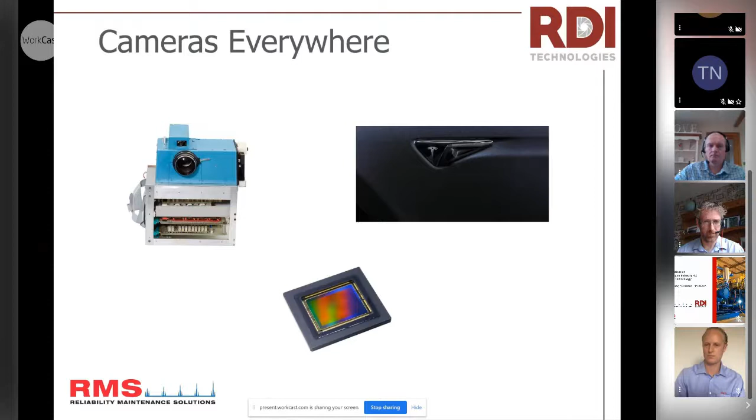Cameras were invented at the turn of the century, but really the digital camera is what has revolutionized the things around us. So here's the first digital camera. You can see it on the screen from Kodak, and then we've also got an image here in the bottom of the CMOS sensor, which really started to change things. That enabled the camera to go into the cell phone, and now we have cameras in cars. So you can see an image of a Tesla there with the camera, and cameras now actually help us drive cars, and that application base is really growing.

We're using them again to drive cars. They're used in AI to distinguish objects, to tell the difference between a human and an animal. They even show me who's at my door. So a Ring doorbell, for example, where my cell phone alerts me to let me know that there's someone at the door. And they control traffic. So they know when you run a red light, and then they send you bills.

Cameras now automate billing processes. Every time I drive across the local bridge, I get a toll in the mail automatically from seeing me drive across the bridge. And so as this application base grows, we want to be able to use that for vibration and machinery monitoring. And that's sort of where motion amplification comes in.

So I'm going to play this video. You'll see a series of videos in this presentation. Just know that the videos should be played back smoothly on your end. Perhaps the internet connection is different for everybody, so there might be a little bit of a jitter, but they should be playing back smoothly for you.

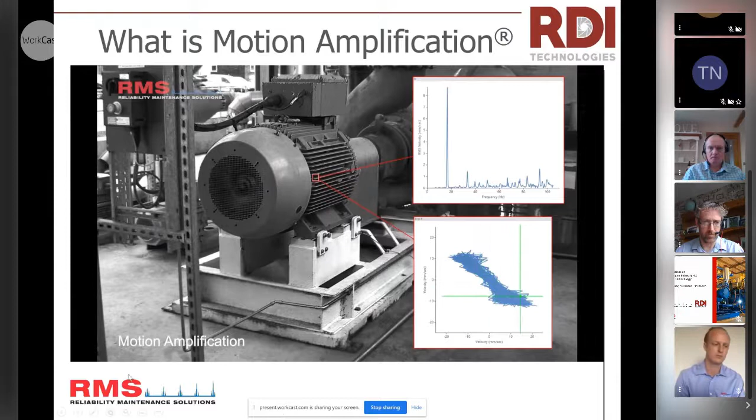But what we're seeing here is motion amplification video, and I'm going to start this over so you can see the beginning here. With your eye, you don't really see any movement, but motion amplification essentially turns every single pixel in the camera into a sensor. And now you've got millions of displacement sensors. Even a modest camera has 1 million pixels in it, and that's even a small resolution camera.

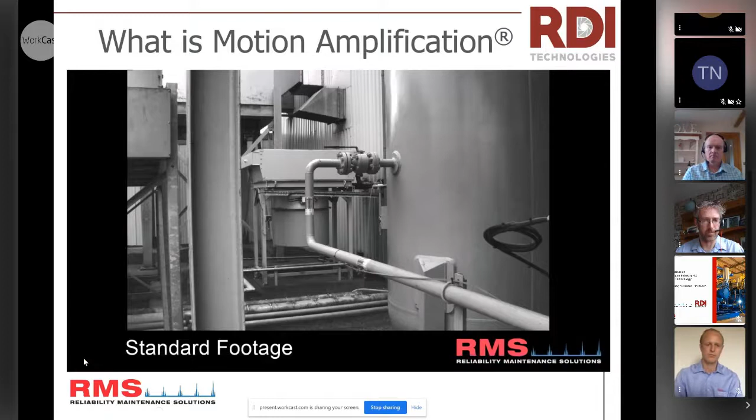And so you can see we can also start to do some interesting things like plot charts and graphs and pull data out. I'll do a short demo showing that. But here you can't see any motion. And now you can turn on the amplification process, and you can actually see the motion. And so this allows the camera to be a machinery monitoring and vibration tool, so that we can visualize motion and also do a lot more: track the motion, measure the orbits, show the plots and paths, measure these things, do spectral analysis, and we'll show some of that in the case studies.

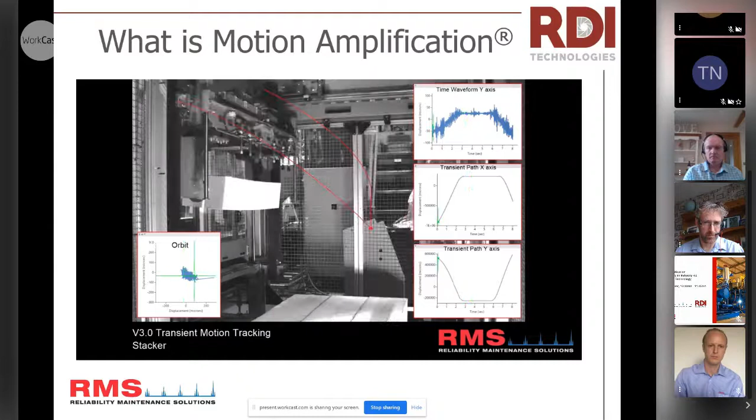And so really what we're trying to do is leverage the fact that we've got millions of pixels, millions of sensors there, that we can use in tandem, and use the human brain to just look at it and quickly make an assessment right there on the spot. And then also communicate that issue to other people, even if they're a non-technical person.

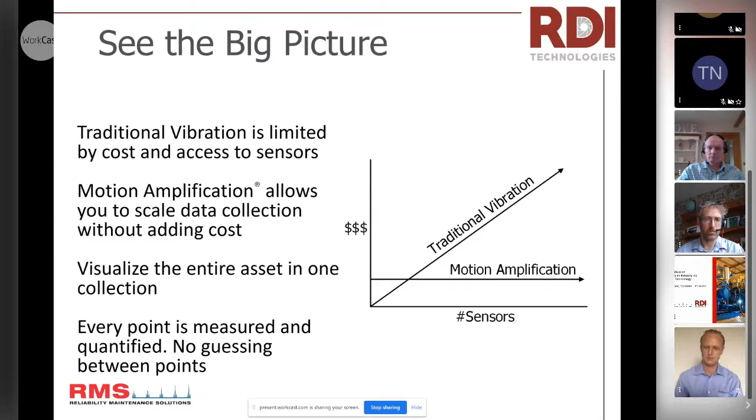So here we can see that as you scale up your data collection process, it gets pretty cumbersome and pretty expensive. But with motion amplification, you can think about adding 1 pixel or 2 pixels or a million pixels. It really makes no difference because it's all nicely packaged in a camera. And you can use that as your sensor and your data collection. You can do full field vibration.

So a little bit about the technical details. It's really measuring displacement. That's fundamentally what we're measuring here, and that makes it a really nice tool because there aren't a lot of displacement tools that are common in data collection with machinery and vibration. You can do it live. I'll do a demonstration here. You can amplify it up to hundreds of times. And you can show individual or overall motions, both. And that's really key because some faults manifest at individual frequencies.

0.01 mils, you can essentially see anything that is of interest to you. So let me go into a demo here, and I'll show you some of these benefits. We'll talk about why it's a complementary tool and how it's improved safety. And then also it measures this large field of view.

That's this full field vibration technique; being able to see the entire field of view and pick out different parts is really important. But I want to also really emphasize this communication piece. I mentioned it before, but I like to usually think of it as one part analysis and equal part communication, because if you collect data and you have the best data in the world, this spectrum tells the story of what's wrong with the machine.

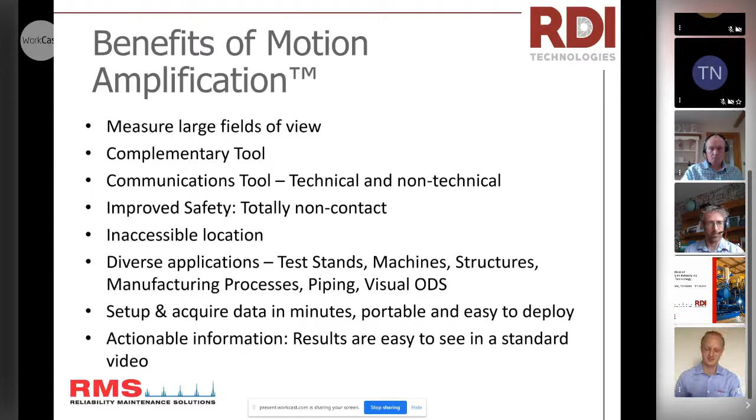If you can't get buy-in from that piece of data to get movement on repairing machinery, it's really as if that data didn't exist at all, because you've not been able to take action. And so that's a really important piece, that last bullet there, the actionable information, because you can actually do something with it. So you've got a couple ways to deliver it.

You can put these systems together, connect them over a network. They all talk to each other. And you can do online continuous monitoring, send videos to the cloud and get them on your phone, and essentially deploy as many cameras as you want through a facility, and they're all interacting with each other.

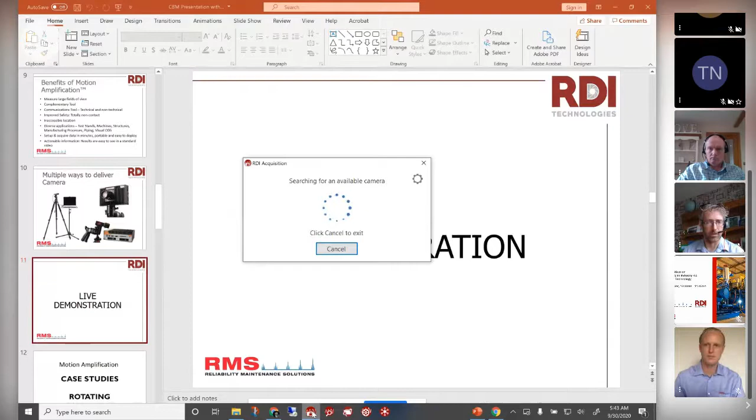Okay, so let me get straight to the demonstration here. I'm going to turn on a camera. I've got a rotor kit, a little machine vibration trainer that I've got set up. I want to turn it on. So, I've already focused this. You would normally focus this, set your exposure, the brightness, that sort of thing. We've already done that for the sake of time, but it takes 5-10 minutes to set up.

One of the things I want to show you is this live amplification. If I just hit this button, I can immediately show live amplification. All the videos that you see here, this is the process it takes to get them. There's no magic going on behind the scenes. It really is this quick. So you can actually do scanning right there in the field with this live amplification.

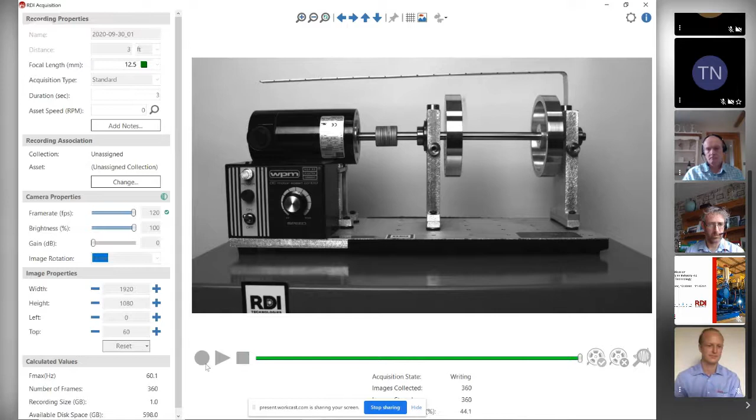If I wanted to know how much that's moving, live on the spot, I can draw a measurement here and actually get a time waveform and a frequency spectrum right there. That tells me that's moving 1 mil in one direction and 5 mils, or 10 mils peak to peak, in another direction. Let me take a data collection here, just for about 3 seconds. And then I'm going to go into the amplification process.

I'll turn that rotor kit off so it's not so loud. And then here we've got the amplification software. You can see I can play it back and it's instant. There's no processing time for this. And again, if I wanted to make a measurement, you just draw a box here. You can make as many of those as you want. Pretty easy. I'm going to move that box up here to the tip of that cantilever beam and make a measurement there.

So if I were to isolate that one, green means it's going to stay, and I hit apply, it's going to go through the process of filtering the data here to only show that one frequency. And that's really important because, again, certain faults manifest at one frequency.

Another thing I wanted to demonstrate is the speed at which you can do this. The key part here is that this is field usable. All this can be done in the field - you make an analysis and look at it right there on the spot.

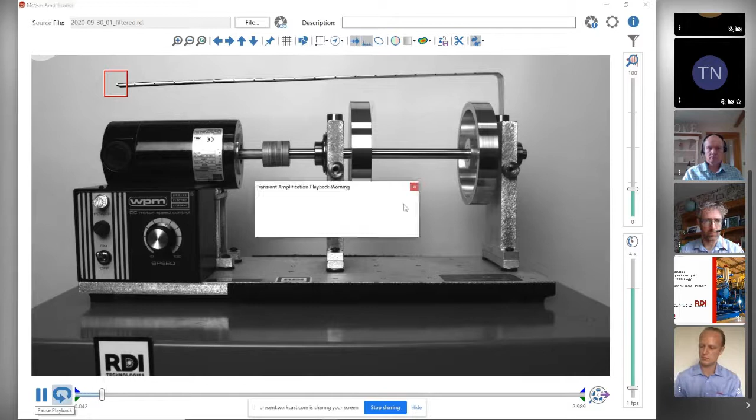Remember that motor was moving quite a bit, but if I play this back, you can see that the only thing moving is the beam. You can see that beam moving up and down, and the motor's totally frozen. Again, we filtered for the beam frequency.

If this was a fault, it would manifest and show you exactly what the fault is. Let me go back and show the original, where everything was moving. You can see now we've isolated that beam frequency. I just wanted to show a short demo to set Stuart up here.

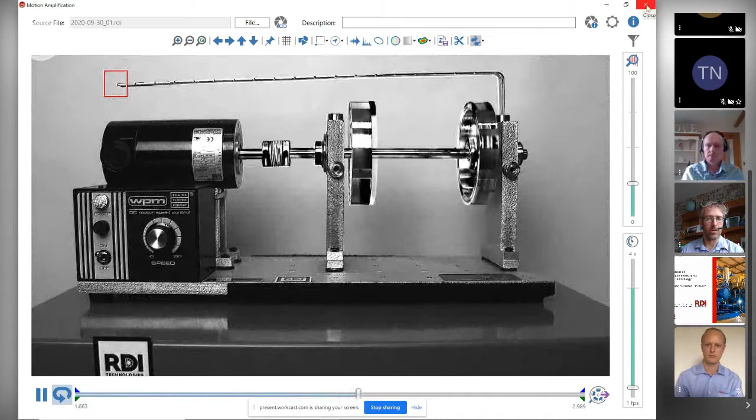I'm going to hand it over to Stuart. I just wanted to show, in preparation for the case studies he's going to show, exactly how easy and quick it is to collect these videos.

Thanks for that, Jeff, great presentation. It's Stuart Walker from RMS, and I want to go through a few case studies and examples of the technology. As Jeff mentioned, for me one of the most powerful things with this technology is its visual aspect. I've been to a lot of sites, and quite quickly we learned that the visual side was key, because people could understand the faults you're seeing.

So Jeff, if you want to play the first slide please. We've got a pump here, and as you can see, there's the standard footage. Then as it moves, you can see the concrete base has failed. This becomes really clear with the camera - there's your standard footage, and you can see there are cracks there. So very easily you can see this whole base needs repairing. It's not just a fault on the motor or pump.

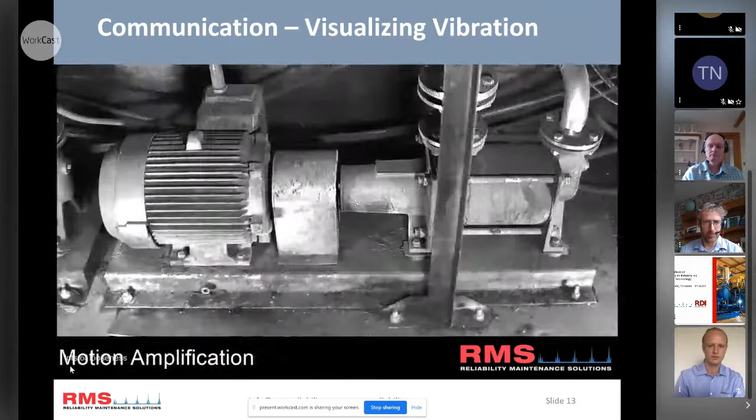This next set, they had lots of reliability problems with these pumps, and we can see the motion there really bad - again, base problems. I think you can also see some misalignment; the pump and motor are moving out of phase. This needs a total overhaul. Again, the beauty of the camera is you can look at the whole system - we can see the pipe trying to rip the pump off the bed, and we can do a measurement there as well. So from a communication tool, unbelievable.

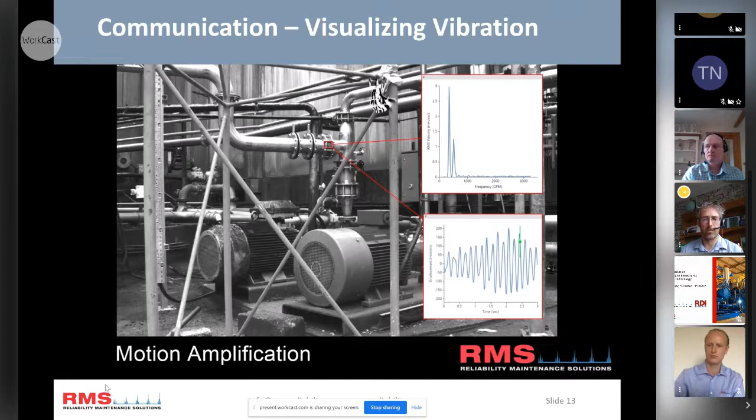I've been to sites where faults that weren't repaired before are suddenly being repaired because people understand the problem. Next slide please, Jeff. Sorry Jeff, next slide.

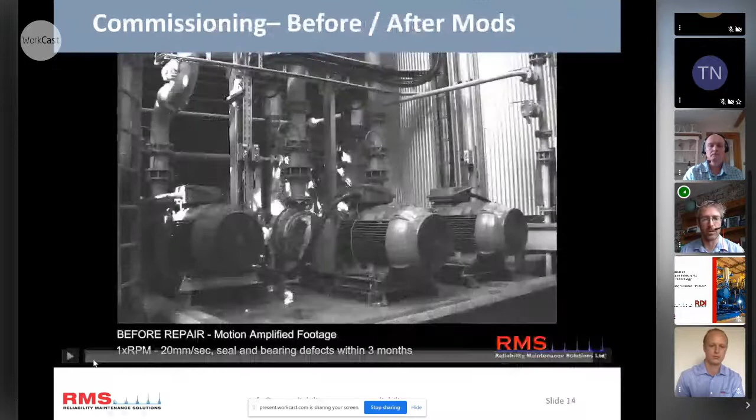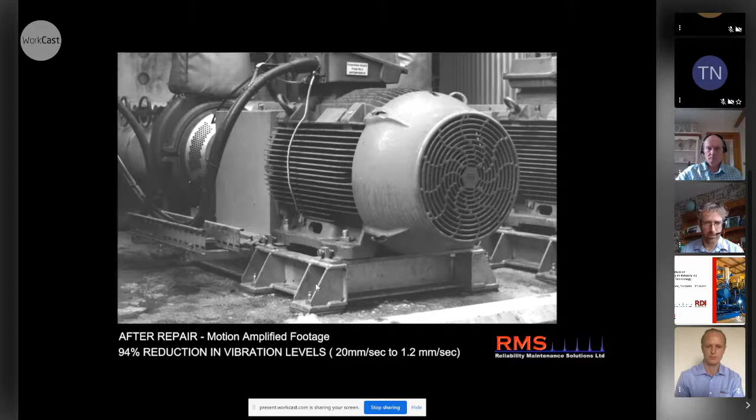Here we've got, again, a base problem. These were newly installed pumps with a lot of vibration on them - 20 millimeters per second, bearing faults, seal failures. The CBM team wanted us to have a look with the camera, and the camera just exposes all the weakness with the base, every little looseness. Eventually these bases got replaced, and now you can see we've gone from 20 millimeters per second to 1.2 - a 94% reduction.

What's key in these videos, you'll notice when the vibration levels are low, when we amplify the video you don't actually see any motion. In other words, you can't make a good machine look bad. Next slide please, Jeff.

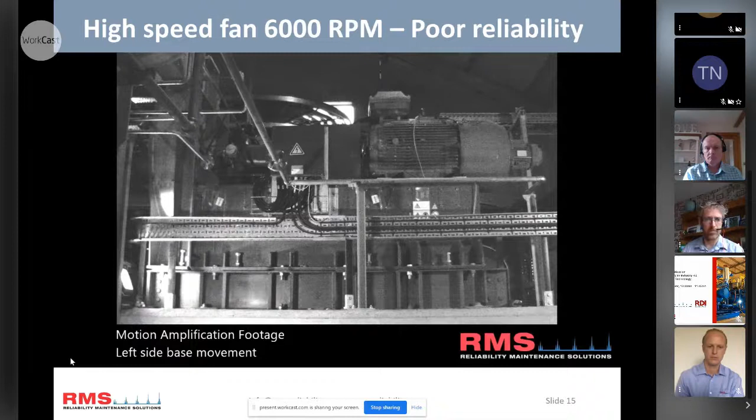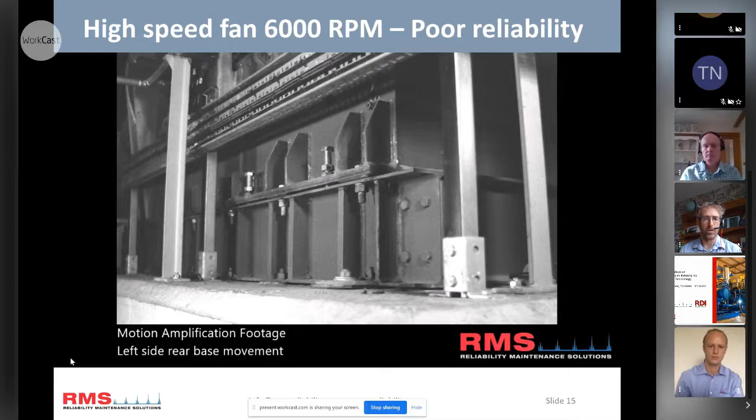This machine is a higher frequency machine - a fan doing 6,000 RPM, and they were getting raised vibration levels on the motor at the rear. When we looked with the camera, we could visualize the whole asset, and we could see vertically the motor had motion. Looking closer, we found it was the way the base had been mounted to the concrete plinth - there were packings used, which wasn't good. You can actually see the motion there. It's not excessive, but it's enough - it's doing about 10 millimeters per second, this one.

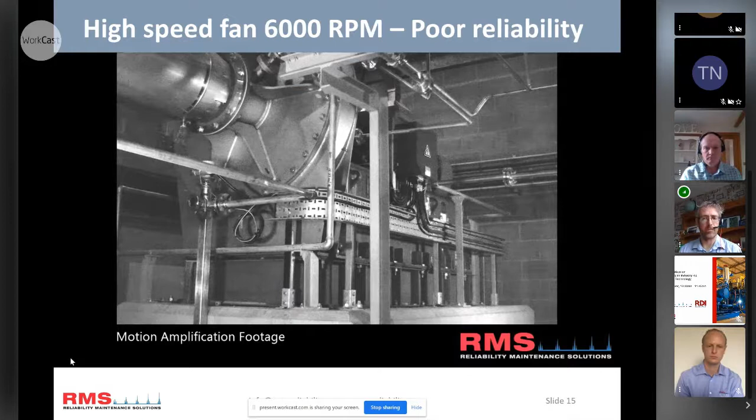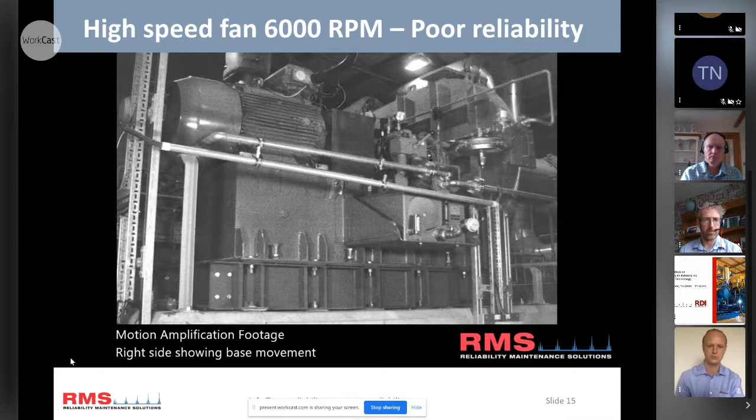We could even see a loose bolt there, and you can see the flexing of this structure. You've got to imagine this thing is doing 6,000 RPM, so this is occurring really often when we're looking at the data. We do lots of different angles when we get on site to document the machine - we don't just take one shot, we'll look at different angles to see where we see the motion. You can see on this right-hand side, this next shot really shows the problem with the packings - the motion there, it's resting, it's flexing, and this is the problem of this machine. They're currently on with repairing this, and I'll get some aftershots.

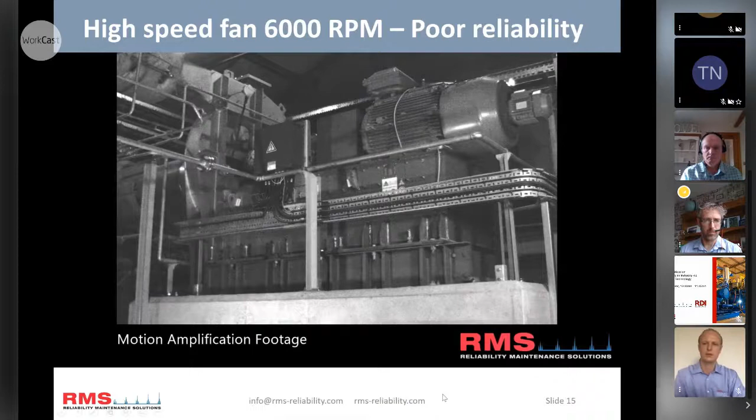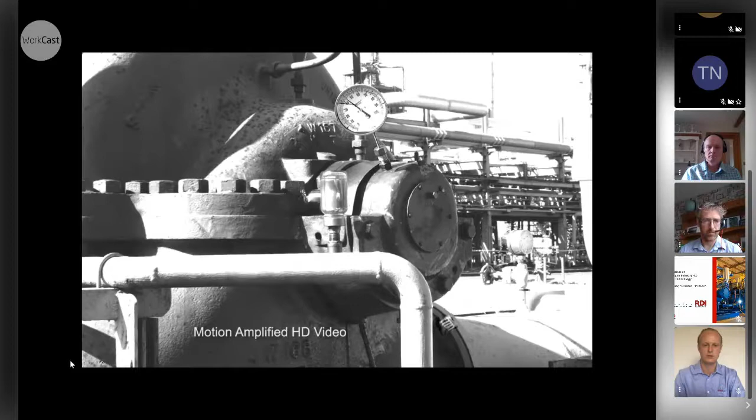So this was an interesting pump problem we had. It had repeat failures, seal and bearing failures. It turned out the problem - if we watch the video here, this is standard footage, and then we see the motion amplified. Can you see it's sort of flexing the bearing? Initially we thought it was loose, but when you look, everything's tight. So these are actual forces inside.

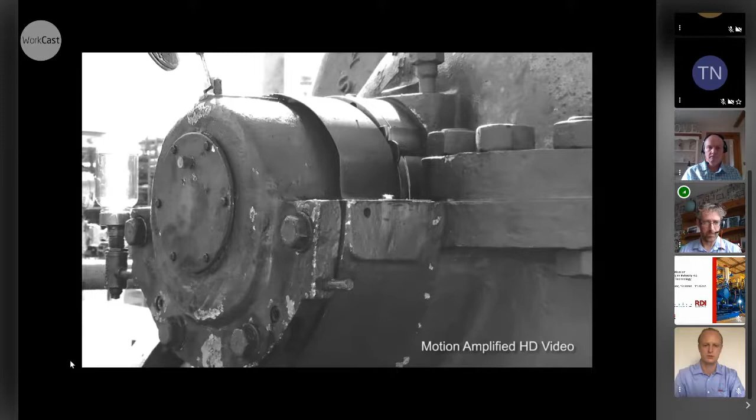After we saw that, we said, what's the history of this machine? And it turned out the housing had been machined incorrectly two years previous, and that was causing the problem. Next slide, please.

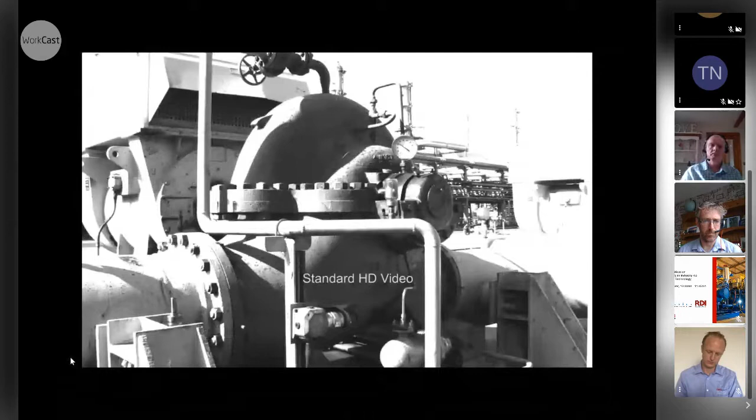So this is one I actually got last week, the follow-up. Very often pumps are put on VSD drives, variable speed, in the modern way of doing it. But unfortunately, if you hit a resonance, you're going to have problems.

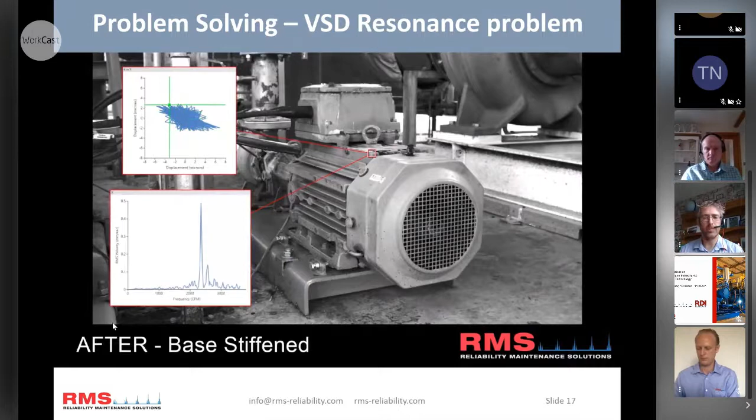So if we play this video, I'll show you the before and after. So this is the before - it's a resonant condition, the base is flexing, lots of vibration up to nearly 20 millimeters per second. Stiffen the base, and you can see there's a massive reduction, I think it was 18 down to 0.5. Big difference before and after, and it's so visual with the technology. Next slide, please.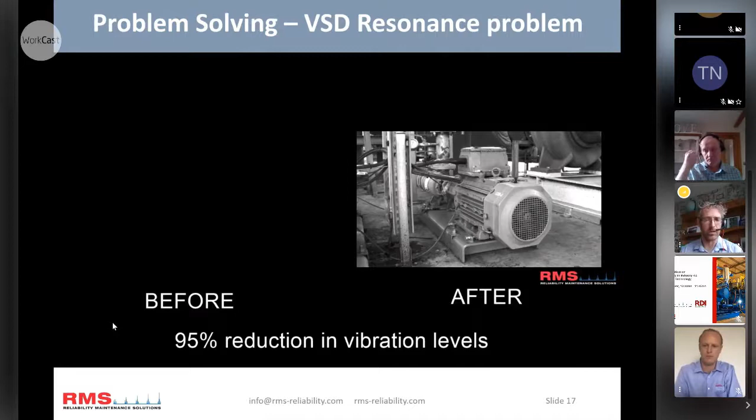So we're going to look at some piping examples now. The camera really excels at this because we can do non-contact, and a lot of piping, especially in the oil and gas industry, is quite remote. You can't put accelerometers on there easily. We found the motion amplification is a great tool for scanning. So if we play the first video...

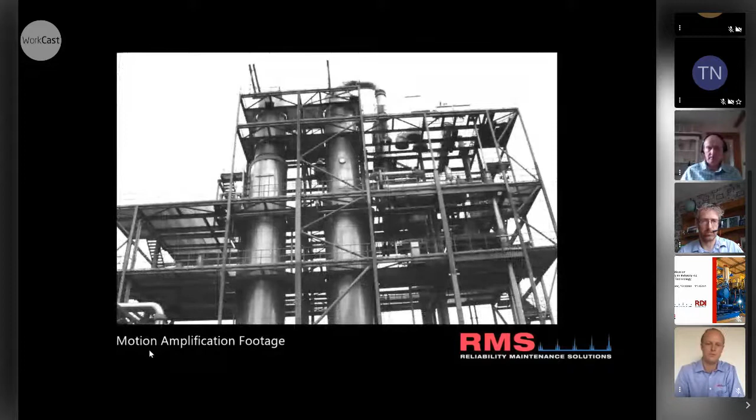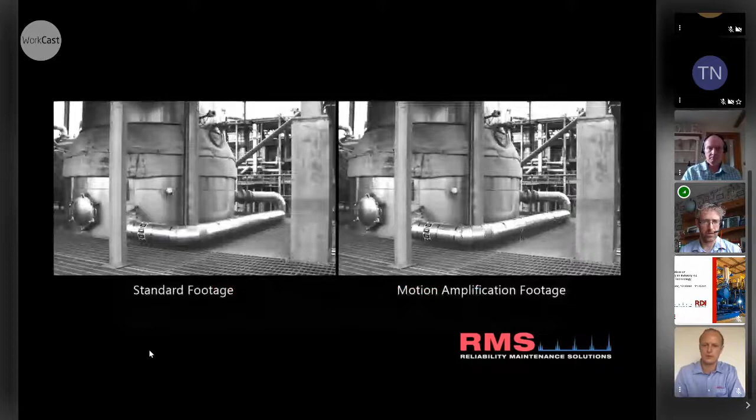Like Jeff showed earlier, you can use the technology in live mode. So when I looked at this distillation plant, I'm quite far back here, looking at the whole asset live in the field, and I could see in the center section there's some pipework that's vibrating excessively. We do a quick non-contact measurement. We can see it's been excited by the flow, and its natural frequency has been excited. So what we did, we got closer to the asset, we got up there, got some closer shots, we could really see what was happening.

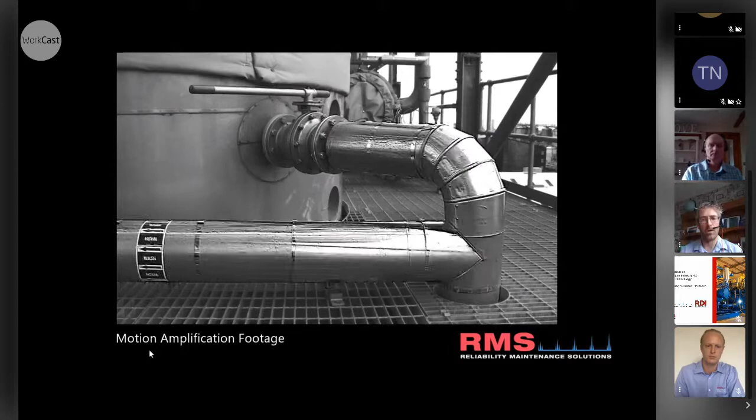This is putting a lot of strain on the connections here, on the flanges to the column. So what we do, we can take a non-contact measurement and apply some Energy Institute guidelines for pipework vibration that can tell us if it's an actual problem we need to look at. We looked at the frequency and the amplitude, and we could see this was definitely in the concern bracket. So we would recommend some more pipe support here. Okay, next slide, please.

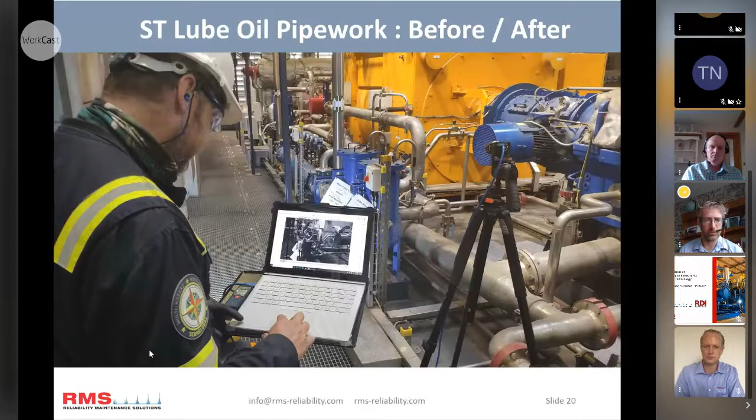Yeah, if you want to play that one please, Jeff. So this is a steam turbine, brand new, and they had lots of lube oil pipework vibration. They could tell it wasn't great. This is a brand new machine, and we were asked to look with the camera at what we can see. So this is what you see with your eye, and then with the camera, lots of motion going on.

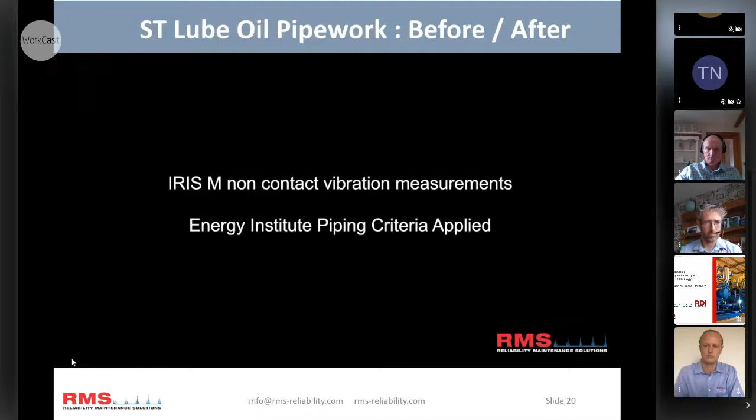And if you remember when I said we're seeing it with the camera, it's generally usually out of spec. So we're taking lots of different angles - there's the oil cooler, the HP end, the LP end. They were all showing quite high vibration levels on this pipework, and it was at a frequency of the generator, up to 15 millimeters per second on some of this pipework. So we applied the standards, and we could see a lot of it was out of spec.

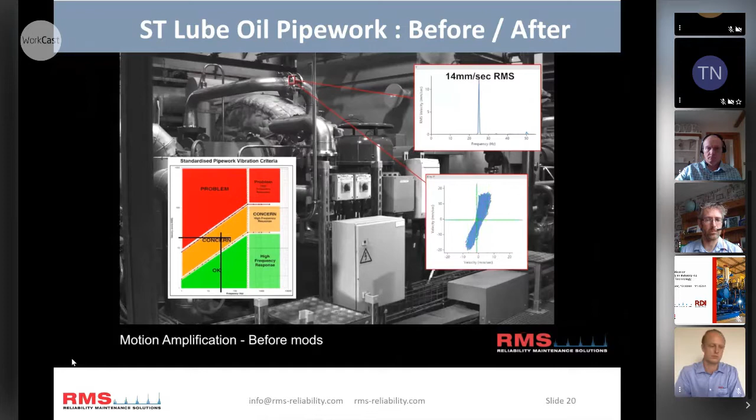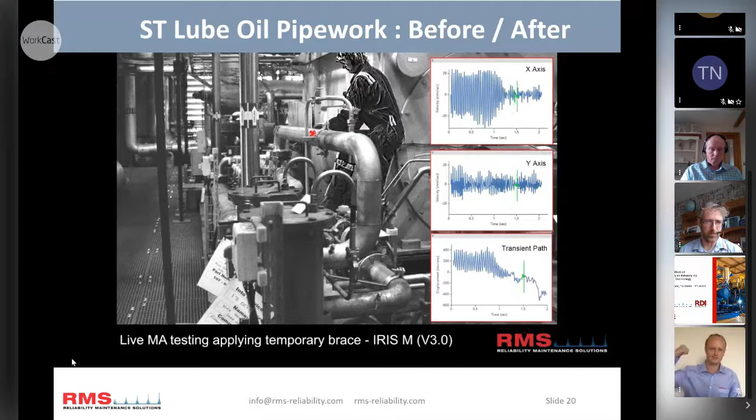So what we then did, the turbine was off, and we did some bump tests just to confirm the natural frequency of the pipework, which was very close to the generator at 25 hertz. So then the next thing we did, and this was really key - we were on site and wanted to do some temporary bracing, so I went into live mode with the camera. Keith's here and he's actually tightening up a brace. I'm watching with the camera what's happening to all the pipework, and he absolutely killed it at that point. For me, it was like having another pair of eyes on site.

So we added some braces in key locations, and this was the before shot. And then we'll show the after - we reduced the levels massively.

I think we've got them down to like 1 millimeter per second, 2 maximum maybe. This is before, and this is after.

But I can't stress enough how it was like having a second pair of eyes. It's just unreal when you've got this technology and you're trying to do a job like this. You're really worried at times, if I brace it here, what's going to happen elsewhere? Well, with this camera, we can see everywhere, so it's not a problem.

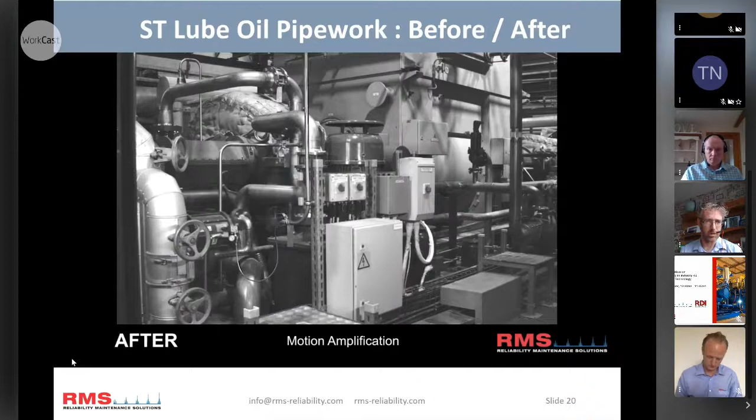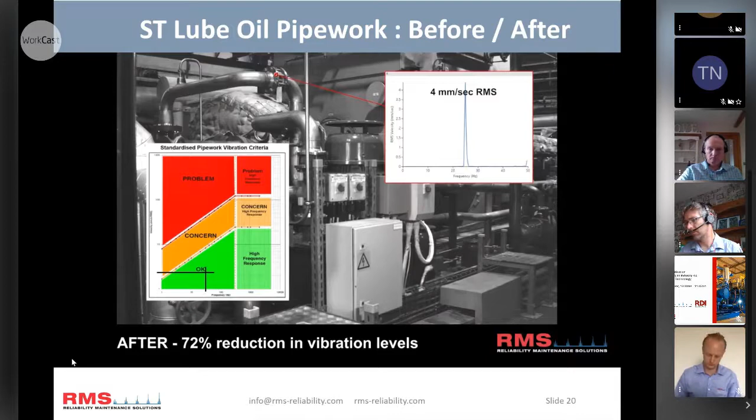So again, after we'd done these scans, we did some measurements just to compare to before, and you can see on the graph we're down at 4 now millimeters per second. The problem with this pipework, if you leave it with high vibrations, there's a real chance you can fatigue fail pipework, and as we know in the oil and gas petrochemical industry, that can have serious consequences for pipe failures. So the technology worked really well in this example.

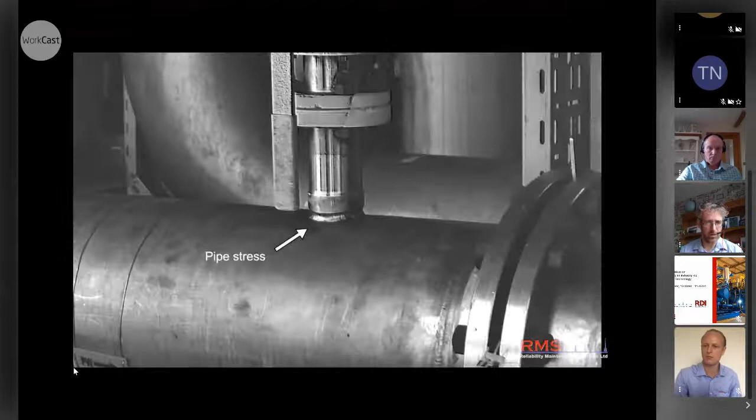Okay, if we play that one. This was an interesting one. A lot of sites have used the camera for scanning large areas of plant, and this was on a survey of doing lots of machine trains, looking for problems, and you can actually see on this one where the weld's going to go. You can actually see it, it's that visual.

So again, it's been excited. It's well out of spec. And on this one, we recommended a brace in the direction of the motion. And we can see here the before and after, 94%. So there's no issue now. This small bore branch isn't going to fail. So yeah, a nice job, that one.

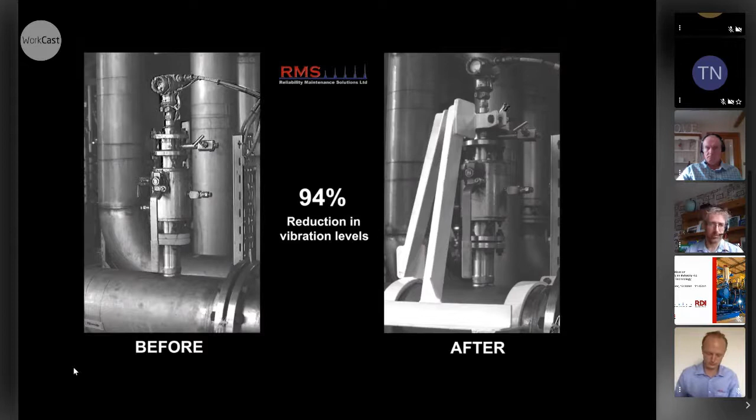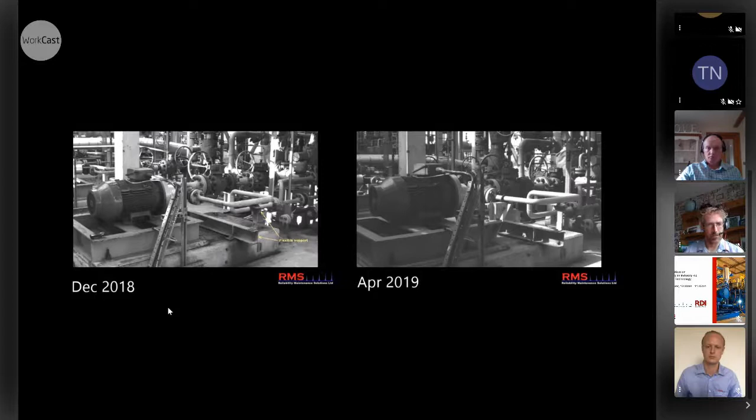Yeah, play this one. So this is an interesting one. This one's a lot higher frequency. So this was a glycol pump. It's before and after this. On the left's the before. This is the after shot. And it was actually the pulsation frequency of the pump here.

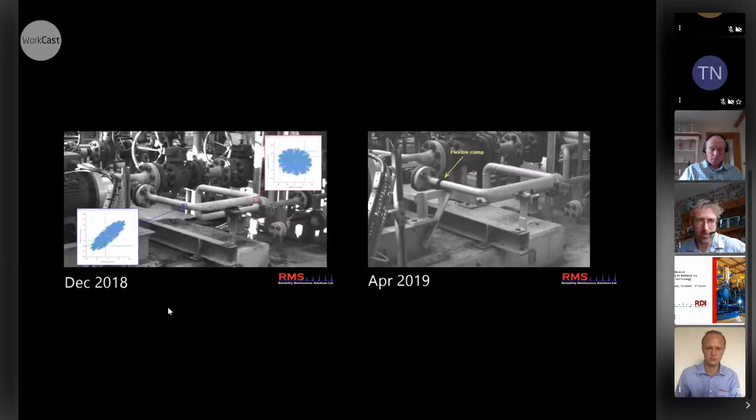So on the left, you can see quite a lot of motion on the pipework. They were getting problems with a pump failing as well. And this is at 250 hertz, this vibration. So we use the MX camera, we could visualize the pulsation frequencies, no problem. But we can see a dramatic drop in vibration with the extra clamps we fixed on. But what was really interesting with this machine, the main problem was actually the pump failing.

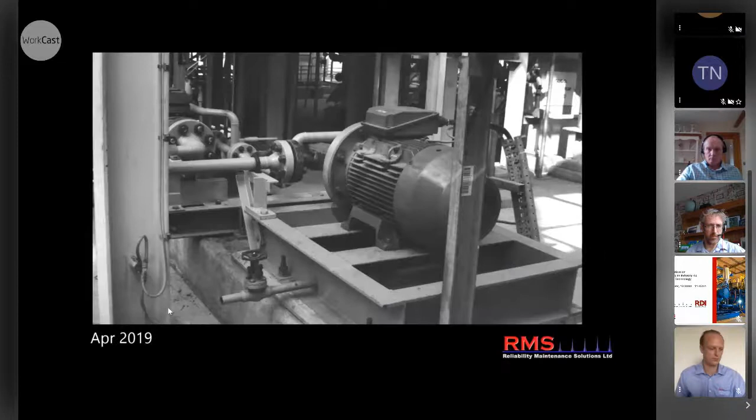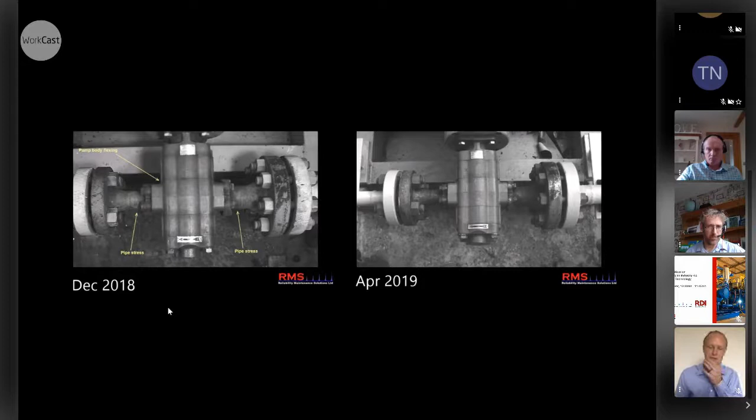It was only lasting 3 months. And when we looked at the motion amplification videos, you'll see a shot coming up. It was quite clear it was the pipework that was flexing the actual pump body, and these are tight tolerance. So the left shot's before, the right's after. So we dramatically reduced the flexing on that pump, which in turn, I don't think they've had a failure since we've done these mods now, which proves that it was the pipework causing the pump problems.

Okay, next slide, please.

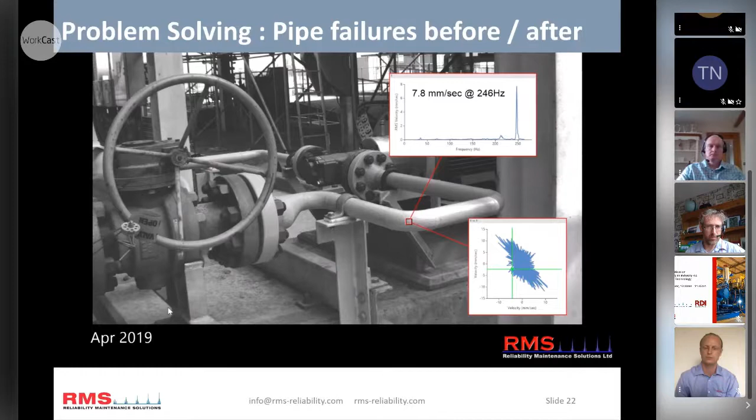So what I'm going to talk about now is just some structure ones. We've had a few questions actually saying how far away can we be? Well, if you've got a structure and there's motion there, we can visualize it. So Jeff, if you'd like to play the next slide, please.

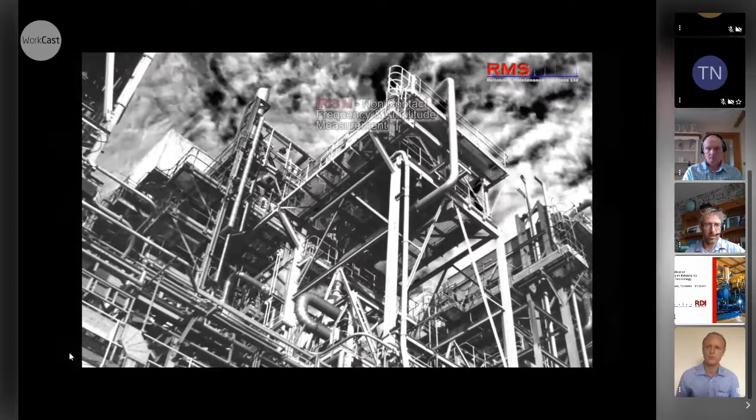So the first one's quite a large chemical plant, lots of different sections of plant, and there's the standard footage, and then there's the amplified. And you can see on the left-hand side, there's quite a large piece of the plant that's vibrating. This is very low frequency. The camera can handle right down to 0. And you can see we can get a measurement off there.

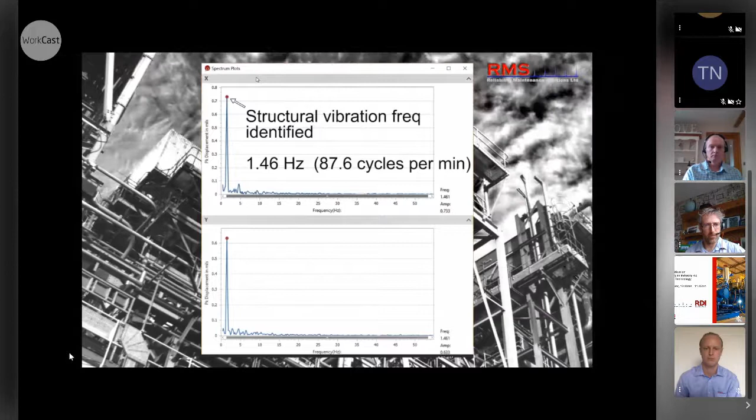A lot of structures vibrate quite low. This was at 1.46 hertz. So on the videos, we actually speed it up to see the motion. And the result of this, it was being excited by an agitator nearby. When we turned the agitator off, the whole structure stopped, so we knew it was that. But the fix was putting some bracing around the bottom of the structure itself, which cured it quite well.

I need a follow-up on that, but it worked well. Next slide, please.

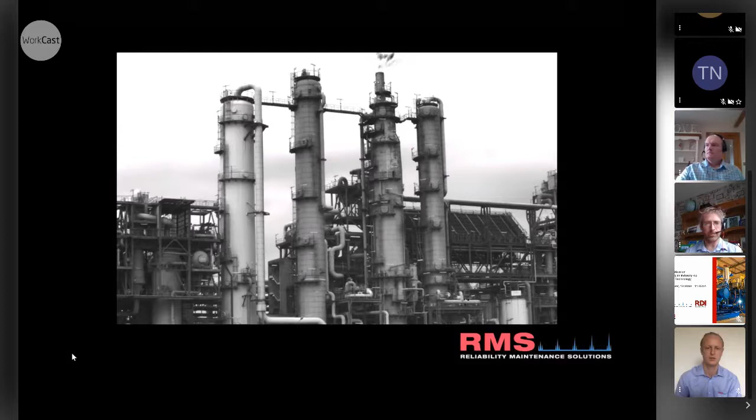Right, just to show you the scale of this camera, these columns are on a petrochemical plant and they're around 200 meters away. And you can see the right-hand column, it's quite scary actually, quite a lot of motion. The guys on site knew it moved, but we were quite shocked when you can actually see it. And we can measure that.

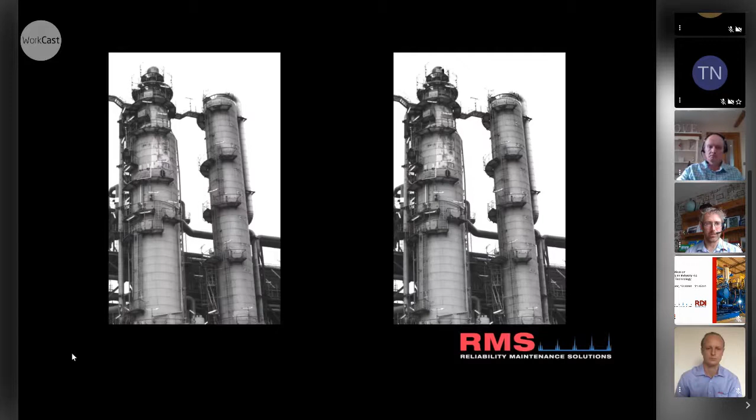As long as we know the distance to the point, we can actually get accurate measurements. What was the cause of this is it didn't have a dampening device. A lot of these towers have water tanks there that sort of stabilize the column. This one didn't, the others had. So I think they're looking at maybe implementing that on this site.

Okay, next slide, please.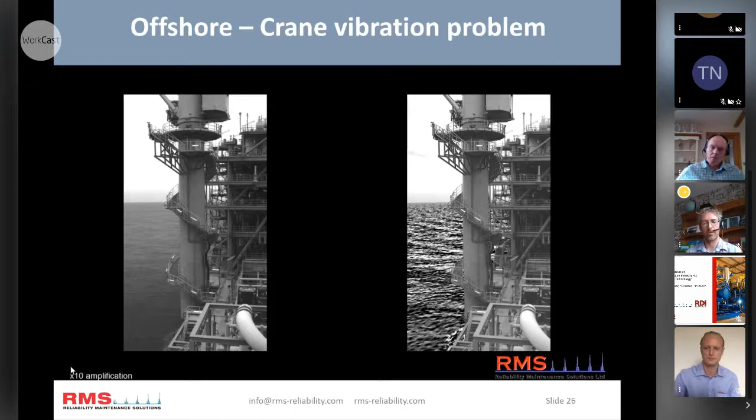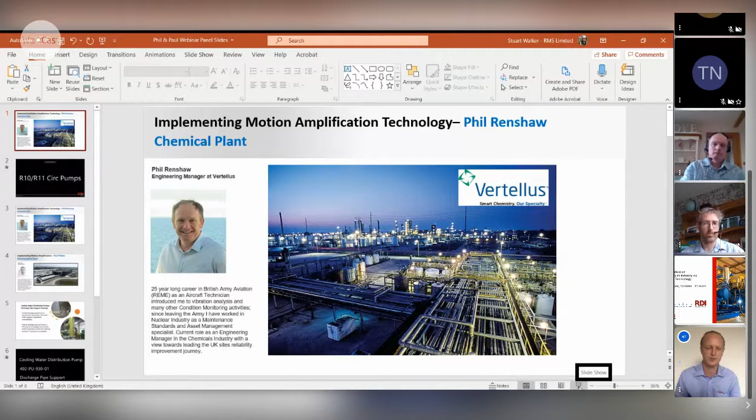Yeah, thanks, Stu, and thanks, Jeff. That was really good, really informative, and I think we've answered some of the questions there just by going through those slides. It was really good. Thank you very much. Funny looking at those pumps as well. I don't know if any of you guys have pumps that can dance like that on your sites, but they were quite impressive videos.

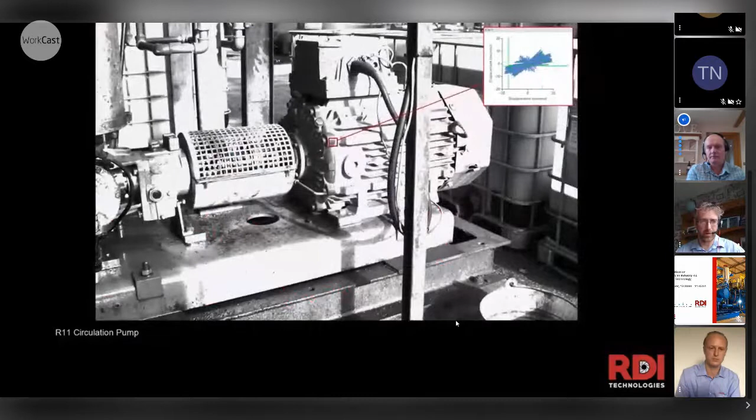We had a problem with these circulation pumps on 2 of our reactors, R10 and 11. This is before we did any work. What you can see is a lot of pipework movement, the base is actually flexing underneath the motor and moving. It was basically just thrown onto some steel and that's it. You can see the frame moving and everything else as well. There's issues with alignment, the whole things were going all over the place, and we were changing couplings every 4 weeks on R10.

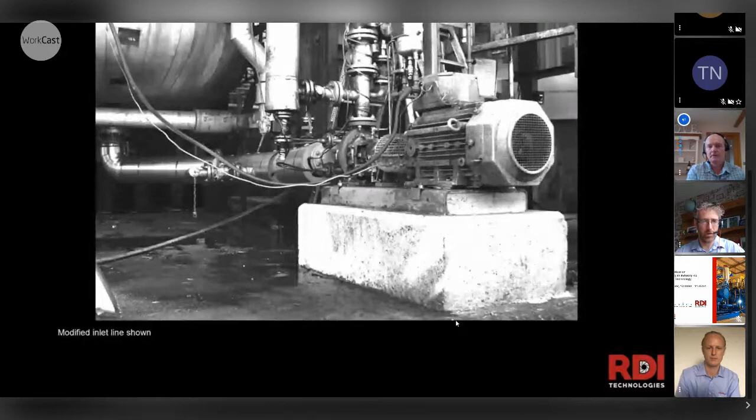So it was costing us an amount of money. So once we highlighted that, we then put in a request for some funds, which we got, and this is what it looks like now. So we've got new bases down, we've mounted the pumps properly, we've aligned everything, we've strengthened pipework supports, we aligned the pipework properly. The only thing that's moving now is some small bore pipework, which we're also fixing on the sample point.

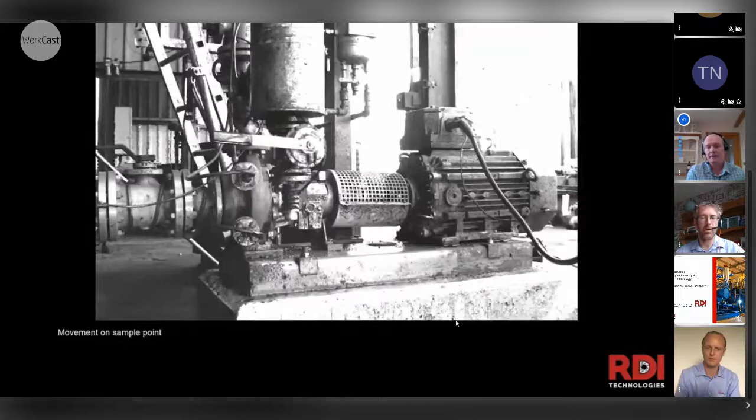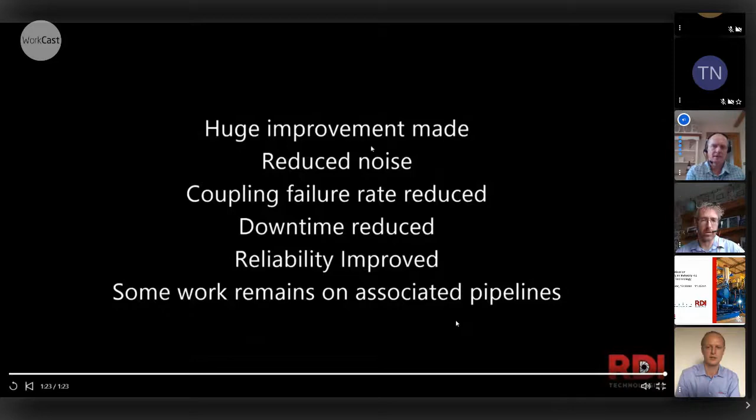But the level of vibration and the level of failure that we've reduced is massively significant. Going from changing that coupling on that pump and motor unit every 4 weeks to running it for 6-8 months without doing anything to it, pretty much, other than standard routine maintenance, is massively significant in terms of your engineering hours and your operator hours. 4 hours to change a coupling, and we're saving that every 4 weeks, and that's 4 hours we can use elsewhere. So cool. And then being able to demonstrate that back to the company and say, okay, so you gave me this money to do this work, and here's the results, and this is how much time we've saved. So that's really important.

That after shots that you've got there, being able to look at it afterwards is a real killer, isn't it? To just show that actually, yes, we do these works, we do it properly, and there's the evidence to show that it has improved it. Yeah, and as Stu said in his case studies there, if there's nothing to amplify, it can't amplify it. So if there is no movement, if the thing's installed correctly and there's no problems with it, you can't just make it move. There's got to be some movement there for it to be amplified.

Yeah. So it's been a huge improvement on our site. And like I say, it's not just the engineering team. For me, reliability is a team sport. Everybody's involved in it. So we've had operators out, we've had the plant managers out, and we've shown them the issues, and then they've worked with us to help us get the work done. So it's a really great technology to sort of get things started as well.

Yeah, thanks. So we just got 1 minute there. Let me ask you for the last minute, what kind of tips would you give for the guys out there watching today? How could they start implementing it? What kind of top tips have you got to help them get using MA and getting it on site and getting it accepted in the minds of the people who work there, the maintenance crew, and also the management?

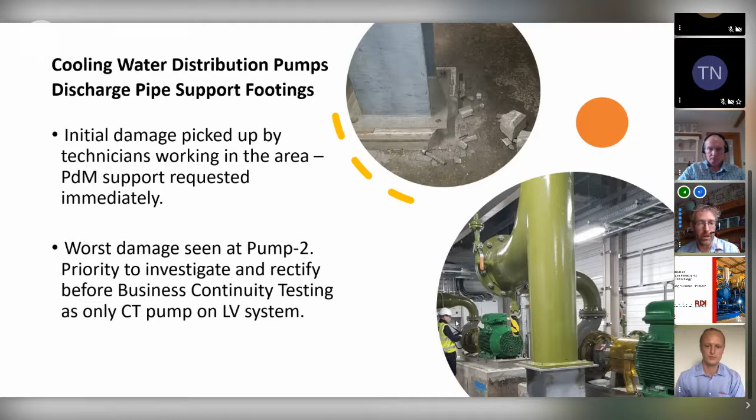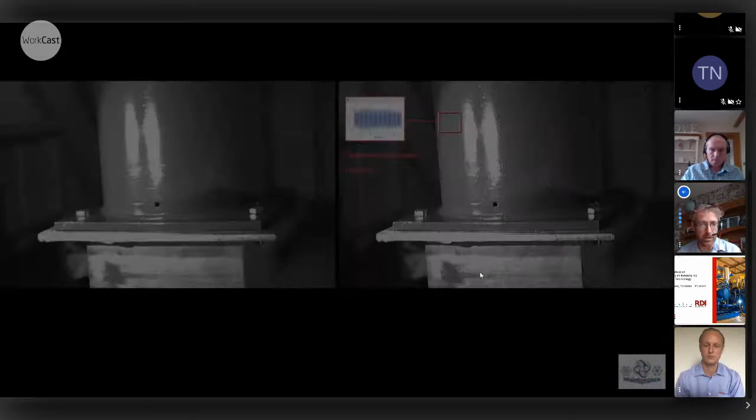I would have got the email, I think, about 9 a.m., and by 9:30 a.m. I would have been over there with the camera, and by about 12 I would have had the videos made, and this emailed back to the people themselves to show where the actual issue was. And then by 3 o'clock I would have had that little drawing done of where I thought the best support would be, and then you're done and dusted within a day.

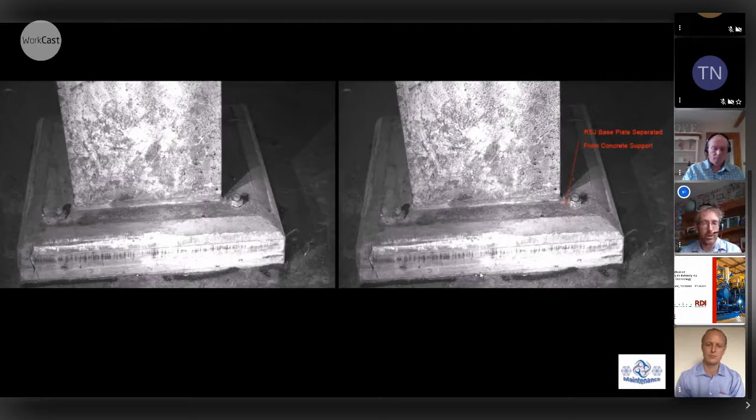Because to me, this would be a small issue. It's not a huge project, and you can't devote that much time to it. But if you have the tools and you know how to use them, you can knock these things out, and then you can come back to the rest of your job, because there's always lots of things to do. So this one was an example of how you're not just using this for rotating machinery, you're also using it for pipe work and for structural supports.

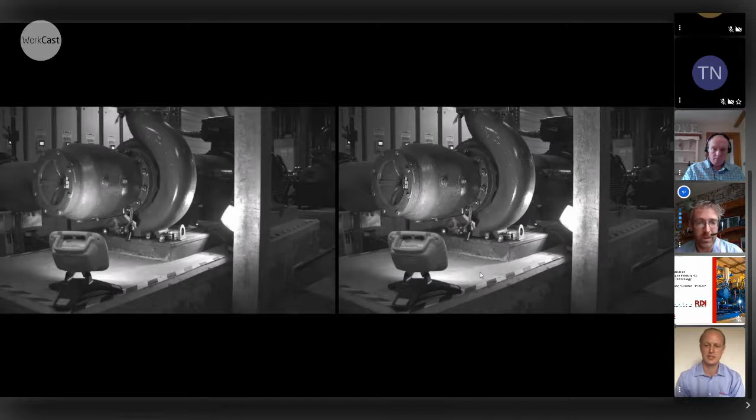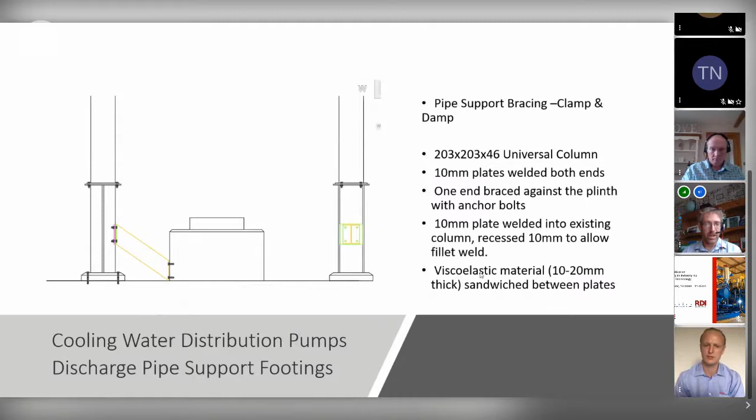And it's an example of how easy it is to use. Once you give these videos to people, there's no debating where your issue is. You can see it. It doesn't lie. So that's the beauty of it for me. So that pump there was actually two issues in one. I think the first issue was the structural support issue. Yeah. And then they went away and they fixed that.

And then, about 5 weeks later, they came back and said, look, that pump is vibrating something terrible. I'm not sure if that pipe support thing worked. So the second video you showed there was actually that. We looked at it with the handheld data collector. There was a huge rise in the 1x, which to me normally means you've either got a balance issue or you might have some kind of flexibility issue.

But if you've got a balance issue in a pump and you want to check the impeller, it's a huge big deal to bring down the pump, to drain down and open up the pipework and everything like that. So the MA camera again was used pretty quickly, within about 2 hours, just to look at all the pipework, the plinth, the base plate, to make sure there's nothing loose, no cracks, and nothing else contributing to that rise in vibration before we got the guys to open up the pump.

And so that again is worth its weight in gold, because to do that, you've got all your permits, you've got multiple people involved, and at the end of it, the plinth and everything was actually fine.

So when they opened up the pump work, they actually found that the strainer had disintegrated and was lodged in the pump itself. So it was a good find for me. Brilliant. That's really good. Thank you very much for that, Paul. It's really informative. Okay, no problem.

Thank you, Keith. We're going to invite Jeff and Stu now, and we're going to do this question and answer panel. So your questions that you posed in the chat area, we're going to pick some of those out, and the ones that you posted when you registered, we're going to use some of those. So if you've got any new ones now, just chuck them in that chat area, and Stu will be able to see them, and he'll prompt them for us to answer. And you can ask anyone on the panel, any one of us five.

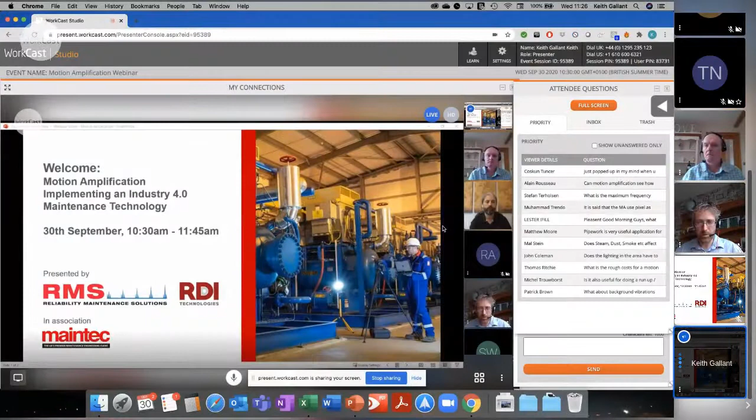So I'll just start sharing a little PowerPoint for us. Okay, so should be coming. Stop sharing. That's not worked for me. Application window helps if you do it right, doesn't it?

Okay, there we go. Right, so our first question is for Jeff. A lot of people have been asking, in the chat and previously: we don't use smartphone videos or DSLRs, and people are trying to get their head around that. Can you explain why we don't use smartphones or DSLRs for MA, when, like you said, I've got a DSLR that's like 12 million pixels? What's the reason we don't use them?

Yeah, that's a really good question. So a couple of things to point out. One, those are really optimized for creating nice pictures and nice videos, photos and home movies, so that's where they're designed. And the second thing is that they're really designed to make very small files, because if you take a long recording on your iPhone, you're going to fill up the space if you're not careful. So they compress a lot of the data, and a lot of the information that we're interested in is actually eliminated in that compression process. That really makes the quality of the data pretty low for what we're trying to do.